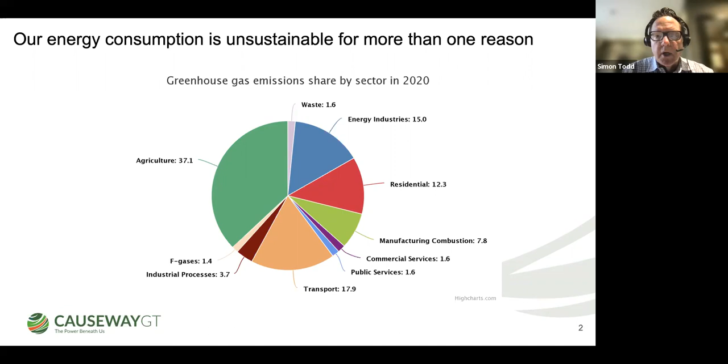And I think it's fair to say that there's progress on mobility, electrification of transport particularly, and there's progress, particularly in Ireland, with the greening of the electricity grid. But it's not just that.

That said, over the last few decades, the cost of fossil fuels, particularly oil, and now natural gas, I would argue, has been creeping up and up. So, for example, in my career in the oil and gas industry, when I started, $16 or $20 a barrel would be happy days. And less than 10 would be pink slips and P45s.

Nowadays, happy days in the oil and gas industry is $80 a barrel, and today's $120 a barrel is exceptionally good. But this is a result of us having to put more and more effort into extracting oil. We're having to put more energy in to get the same amount of energy out.

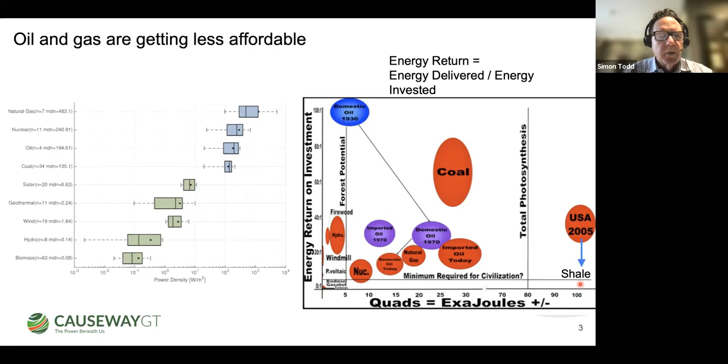So this is another reason why we need to get ourselves off of oil and gas, is that it's becoming increasingly finite as a resource and too expensive for our economy. And then the third reason is security, reliability. And this is illustrated for decades by oil. You know, when a sniff of a crisis affected oil price the next day or the same day.

And now that gas has joined its elder sibling as a global commodity with LNG and far-reaching pipelines, gas has the same problem of supply-demand tightness and relaxation, of geopolitics, of trader anxiety, and of course, unfortunately now, the cost of war and conflict, in this case, in the Ukraine.

And Ireland is right at the end of a very extensive pipeline infrastructure across Europe. Not all the gas is coming from Russia, of course, where the UK only takes about 1 or 2% of Russian gas. Most of it comes from the North Sea and some LNG imports.

But the island of Ireland is at the end, has no LNG import, and is at the end of an infrastructure that has 3 pipelines in the Irish Sea, all coming from a single terminal in Moffat in southwest Scotland. And so that represents a security risk as well as a price risk, because we're dependent on the price structure and price swings in the rest of the infrastructure.

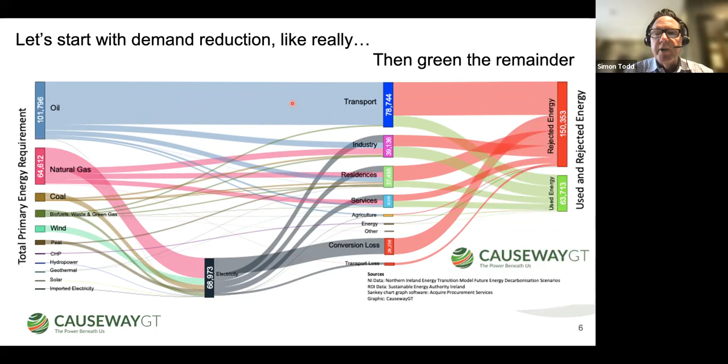So that's job number one with the energy transition, to radically reduce our demand through re-engineering our systems and improving efficiency. And it's not just about technology and engineering, it's about societal norms and expectations. I've picked on SUVs here. There's a stat going around that if SUVs were a country, they'd be the 6th biggest emitter in the world.

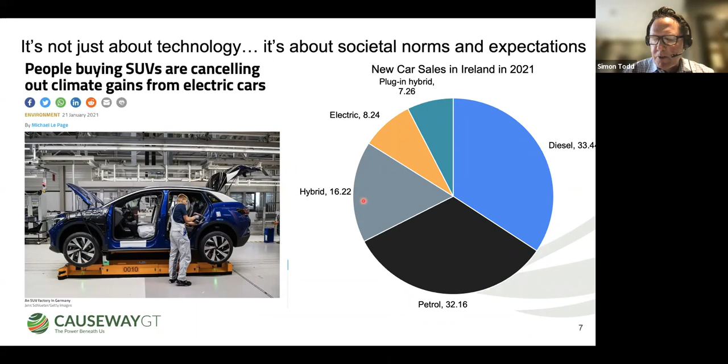People are still buying SUVs and running around in them, even though we are doing a better and better job of hybrid and electric plug-in hybrid sales; this is Republic of Ireland data from last year. But we need a way of changing our attitude and our cultural norms, so that a Range Rover Sport is not the preferred option anymore. It's go get yourself a Tesla Model 3 if you want something fancy, but much more sustainable as an option.

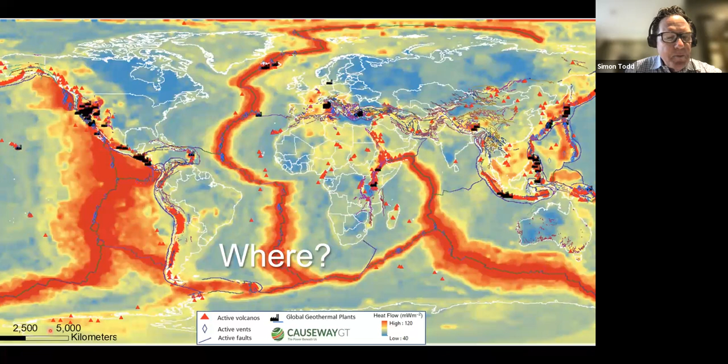Meanwhile, we do know that geothermal is being used around the world. There's electricity generation from lower temperature resources, 80 to 180 degrees centigrade, but they typically are very close to the surface, less than a kilometer. The big energy, 50% of the geothermal energy that's used, is actually used in combination with heat pumps in domestic, commercial, industrial settings. And then there's some direct use. So this is to give us a flavor of what might be possible here in Ireland.

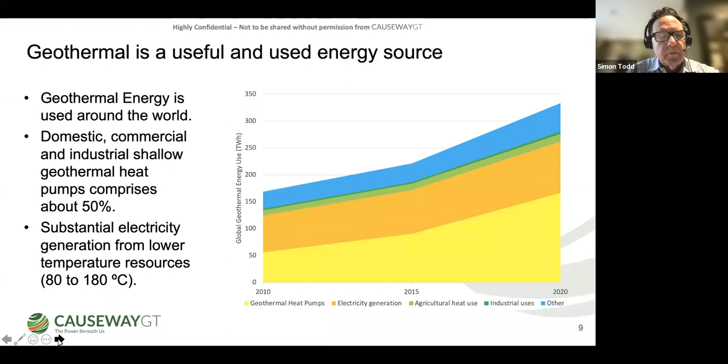A reminder of the principal archetypes. There's 2 geothermal resources, I would assert: shallow, less than 500 meters or thereabouts. Those resources are typically used in combination with heat pumps. It's also a fantastic storage medium, shallow geothermal, which is important and we'll touch on again. And the second one is deep geothermal, typically more than 500 meters, actually considerably more than 500 meters in settings like ours. And that direct heat is for power generation or direct use of heat.

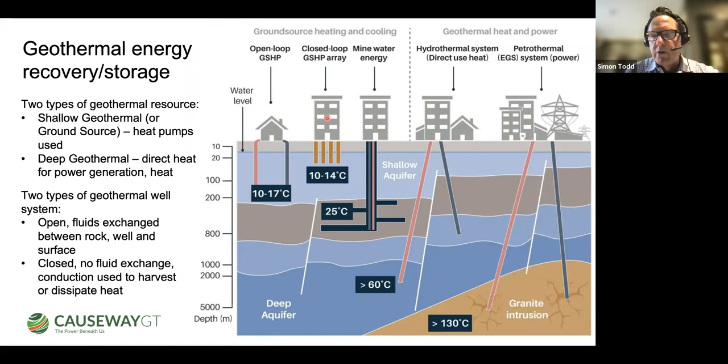Basically 2 types of geothermal system. I'm really oversimplifying this, I know, but one I would say is open loop, where fluids are being exchanged from the well into the rocks and back again. And the second is closed loop or advanced geothermal systems, AGS, where there's no fluid exchange and instead conduction is used to harvest the heat. And on this BGS diagram, the shallow systems are on the left-hand side, and the deep systems are on the right-hand side.

So now to problems. I've got three problems to posit that we could solve or address with geothermal. The first one is the issue of variability and intermittency on wind and solar. Just recently, Ireland did an auction on 9 new gas generation power plants, apparently 1 or 2 of them to be hydrogen ready, all about them being peaker plants. This is because even when you put more and more wind and solar into a regional or national grid, you still need dispatchable thermal capacity to cover off shortfalls when the wind isn't blowing for a number of days, or the sun isn't shining for a number of days.

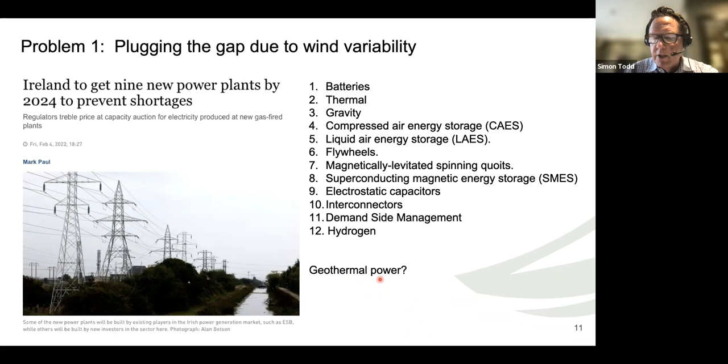And I've put a dirty dozen here of different mechanisms of providing storage of electricity, or storage of energy in the case of thermal, and none of these are really at the moment up to covering off periods of days and weeks. Batteries can do very well for nanoseconds, seconds, minutes, and a few hours, but they can't do days and weeks as yet. And so the romance about geothermal power is, can you use it as a dispatchable base load to complement wind and solar? And an answer for Ireland is unfortunately no, or at least not for some time.

It's really hard in Ireland because the temperatures required for any reasonable efficiency in power generation are at substantial depth. Although binary organic Rankine cycle turbines can generate electricity at 80 degrees centigrade, they really need about 120 degrees centigrade fluids before you've got any reasonable efficiency, and this is still only 15%. And when you combine that with drilling costs, the blue dots are US Department of Energy data, it shows that to get to the temperatures you require in Ireland, you're talking $15 million per well or more, and the economics just don't make sense.

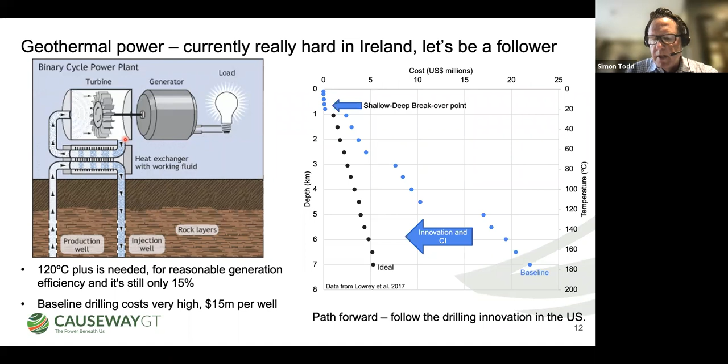So I'm just going to pause before I address the second problem and do a little sidebar on heat pumps, just to make sure that everybody falls in love with heat pumps the same way I have and Causeway GT has. Heat pumps are marvelous pieces of engineering. They actually have efficiencies greater than 100%. And how they do that is they soak up heat from a source through a heat exchanger, and through evaporation, compression, and... I've lost the word.

It'll come back to me, but through the heat pump process, the temperature is elevated, and more heat energy is delivered to the target sink than is used as electricity. So in other words, for 5 units of electricity doing the work of the heat pump, the compression piece, and soaking up 10 units of heat from whatever medium, in our case geothermal, 15 kilowatts of heat are delivered. So the COP, the coefficient of performance of the heat pump in this case, is 3.

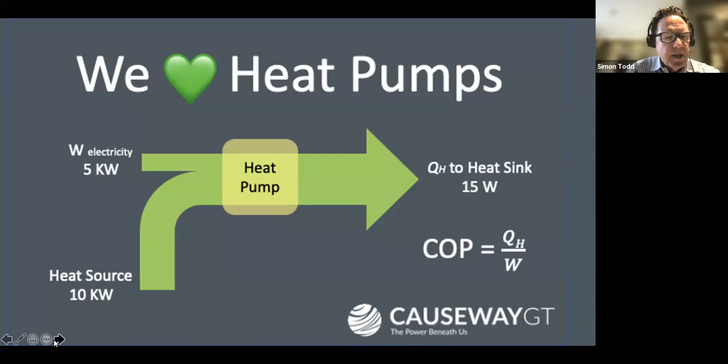Heat pumps are actually able to do much better than that, particularly where you're not having to elevate the temperature so much. So why am I doing this little sidebar on heat pumps and COP? So here's a typical sort of ground source setting, everything from freezing conditions in the subsurface to typical 12 degrees centigrade temperatures. To get to a sink temperature of 55 or 60 degrees centigrade, which is usually the minimum requirement to eliminate Legionella, you need a source temperature of 12, COP of 3 gets you to the required

delivery temperature. Then over in this right-hand chart, I put the same COP of 3 and I track it up along the y-axis of levelized cost of heat. And what you see here is that if I have expensive electricity at 14 pence per kilowatt hour, my gas boiler is actually more cost efficient than my heat pump. But if my electricity cost comes down to 10 pence per kilowatt hour, my heat pump is now competitive. In other words, one of the primary factors for the competitiveness of heat pumps is electricity price and how that relates to the coefficient of performance of the machine itself.

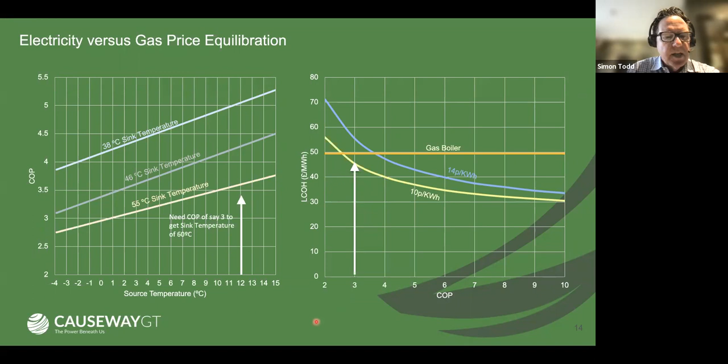So then problem number 2 is heat above 80 degrees centigrade. So this is heat that would be in low-grade industrial processes and high-grade industrial processes. I don't think we can do much in the very high temperature regime, like in terms of metals manufacture, aluminum or steel. But I do know that we can do a lot of good and a lot of elimination of fossil fuels in the lower temperature range from 80 to 140.

How's that so? Well, for example, in the northeast of the island, there's some super opportunities of open loop permeable reservoirs where the geothermal gradient is a little bit elevated as well, and you can see 50 degrees centigrade at 1.5 kilometers depth. Using industrial scale heat pumps, megawatts in scale, a 50 degree centigrade source temperature is really useful when you put a heat pump on top of it, and it can be elevated up to 125 degrees centigrade, which is a bit of a magic number because once you get there, you're able to generate steam, which is a very common fluid used in many different manufacturing and industrial processes.

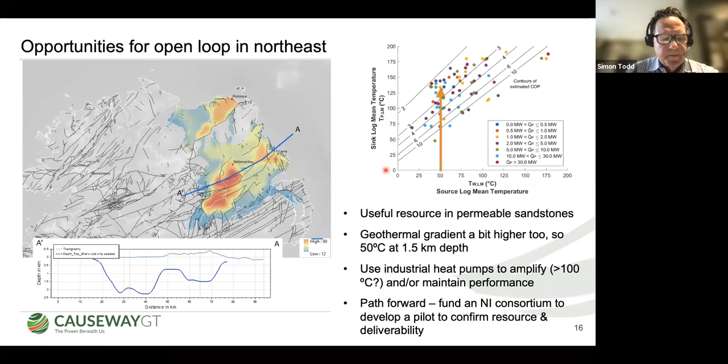So what I'll argue to the group on the call is that one of our priorities is to make a demonstrator of this happen, and County Antrim and the region is probably the favourable place to do this. But that's not all.

In Causeway GT, we're pretty well focused, not exclusively. We will consider open loop, but we're pretty focused on closed loop because although it's got the slowness of conduction to deal with, its advantages are significant in terms of not needing porosity, not needing permeability, not needing to exchange fluids, not needing to worry about induced seismicity, not needing to worry about contamination of aquifers or bringing geothermal brines to the surface, and never ever having to mention the word frack in polite company outside of the state of Texas. So we're focused on closed loop. What can be done with that?

So there's a recent study that's just been released beginning of the year from Cornell University. Beckers et al. are the authors. They ran a number of interesting scenarios, simulation models on closed loop systems. And what they found was the levelized cost of heat from these different closed loop scenarios, the mean, was $46 per megawatt hour. And that's quite attractive. Whereas for electricity, it was over $800 per megawatt hour. And this is essentially the inefficiency of low temperature electricity generation coming through in these costs. So they agree that for lower temperatures, power generation is very challenging, is the phrase they used, but I have to say they did not include heat pumps in their study.

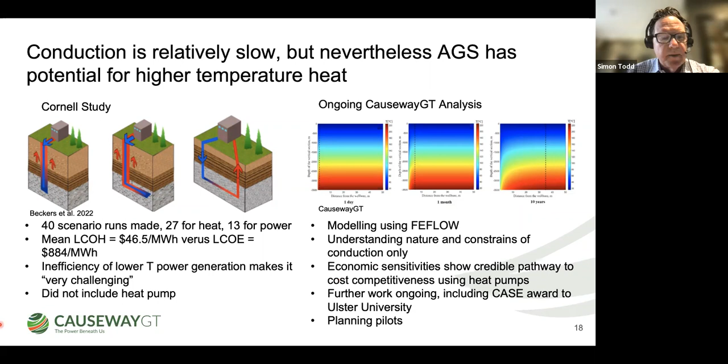There's further work ongoing, including some work led by Professor Neil Hewitt in Ulster University, where we were awarded a CASE grant for that work last year, and we're planning some pilots to test this technology. And if we can make that work, we can do a lot of decarbonization of lower grade industrial heat. And then the final problem is everything else.

Now this is my chart of the distribution of heat use in Ireland. It looks a bit different from the recent SEAI study, and I'm still trying to understand why they've come up with a bigger proportion of higher temperature heat. But suffice it to say that more than half, and I think considerably more than half of the heat that we use is actually less than 80 degrees centigrade. Space heating, water heating, space cooling as well. And this brings us right into the domain of heat pumps and geothermal heat pumps specifically.

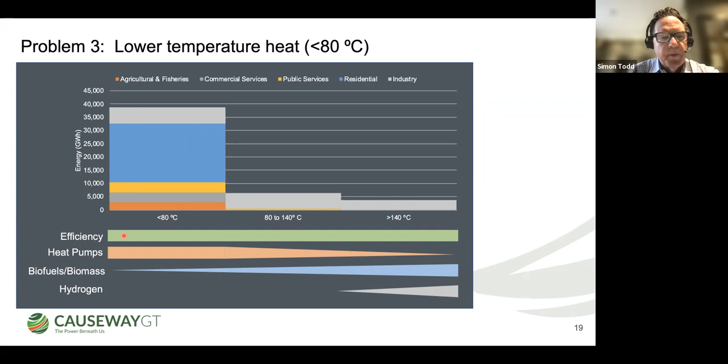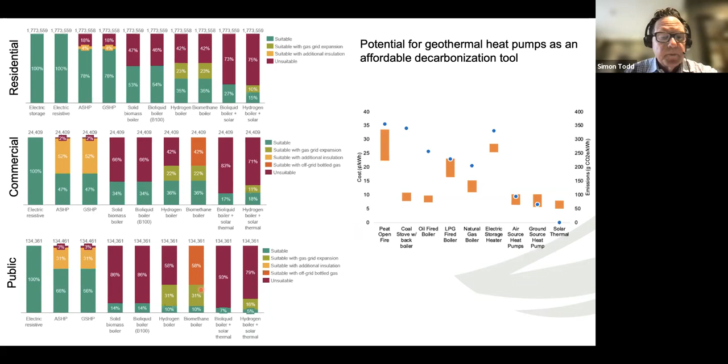Lots of potential there. And then on the right hand side, I've taken some older SEAI data on the costing of different residential heating mechanisms, and geothermal ground source wins the day in terms of efficiency. Also very low emissions, of course, particularly as the electricity used gets cleaner and cleaner. But solar thermal is good as well, and obviously air source heat pumps are good as well. So an interesting combination there between cost competitiveness, emissions reduction, and on the left hand side, suitability. So I actually think that we ought to be persuading policymakers to change the dimension on the use of shallow geothermal heat pumps.

Here, for example, is the case of commercial and industrial lower temperature heat. There's a cartoon picture of Microsoft's expansion of their campus in the state of Washington in the Northwest United States. It's plus 10 megawatt thermal heating and cooling, and it's all served by a geothermal system down to about 150 meters depth, both storage and borehole heat exchangers, and a vast heat network of pipework supplying it. And a very low emissions product as a result.

On the right-hand side, there's a couple of maps, one from GSI, which shows that in the Republic of Ireland, the suitability for closed loop is very high. In other words, there's only about 5% of the country that is not suitable for closed loop geothermal systems. And Northern Ireland is actually a similar picture. I don't want to embarrass Rob Rain, but the map is really good. But the color coding of the scale is misleading, because 1 watt per meter per Kelvin is actually really good conductivity for a closed loop system. And 0.5 or 0.25 would be seen as okay.

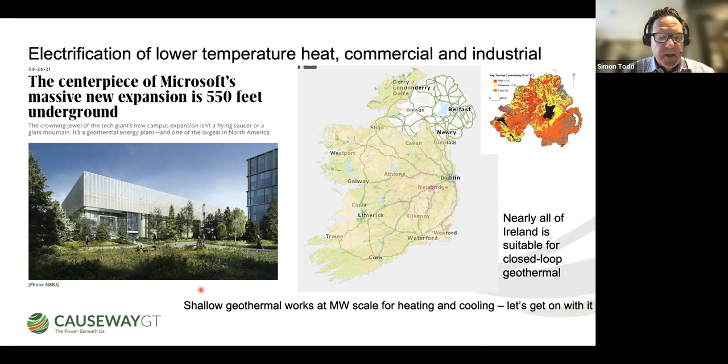So why aren't we doing this already? I hear you ask. And the answer seems to be a combination of a number of different factors. A good way to get to the answer is to compare ourselves to other countries with higher uptake of geothermal, and the poster child is Sweden. And it's an interesting poster child because, according to Helen's map, Sweden, as you might expect if you're a geologist, is actually lower geothermal gradient than Ireland and Britain, and certainly lower than some other countries in Western Europe.

But having said that, Sweden is one of the highest, if not the highest, geothermal energy user, and the vast majority of that's heat pumps, ladies and gentlemen, at the scale of kilowatts to megawatts that I've been describing. So the little cool colors over in Ireland and Britain in terms of geothermal usage, we need to fix that, right? The reasons for slow uptake seem to be about ambition. Sweden has been decades on the journey of decarbonization and are blessed by renewable resources like hydro, I have to say.

I think the second thing is about awareness, and its cousin, myths and legends. People say things like, "Well, heat pumps won't work on leaky homes," and the retrofit's too expensive, or things like that. There's a capability issue. We have some expert resources on the island that know about heat pumps and shallow geothermal, that's for sure. But I actually think we need more. We need more organizations, companies, and capability on this matter.

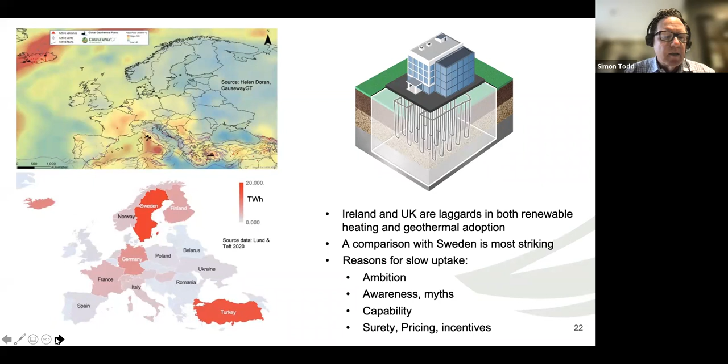I'll get to a little bit more detail on this next point, but commercial developers and operators of geothermal heat systems are going to need some assistance on pricing and incentives and security or surety of their supply. In other words, if I'm putting a geothermal heat system underneath a commercial building, I need to know through a power purchase agreement or heat as a service contract that the owner of the building is going to be using my heat for 15 or 20 years, for whatever the duration of the agreement and the project actually is.

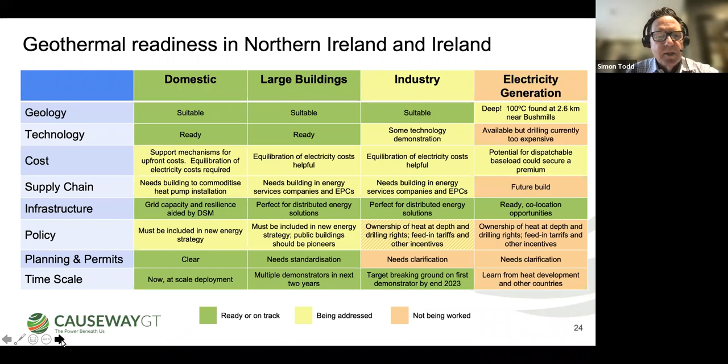So then I think the next slide is my last. Yeah. So Sarah, this would be my segue into the discussion. So this is my view on priorities, policy support, public and private sector. I'd really love to hear the input, questions, of course, about my presentation, but discussive questions on these priorities.

So I'm saying, let's get after geothermal heat pumps, small and large scale, deploy. Let's get after it. Let's get engaging with the public and the stakeholders on this and get their support. It's a decarbonization, low-hanging fruit opportunity. Just let's get going on it, and contribute to technology development on this where it makes sense to Irish needs and the resources and skills and expertise that we have on the island.

In terms of policy support, we certainly do need clear and efficient regulation and regulatory process. We need some help with price structures, some help with heat network and the equivalent of heat power purchase agreement structures. I think there's a super opportunity for both jurisdictions to put their public buildings and land up for tender for demonstrators and pilots. And we should do that with some funding from government to support those pilots and demonstrators in both jurisdictions.

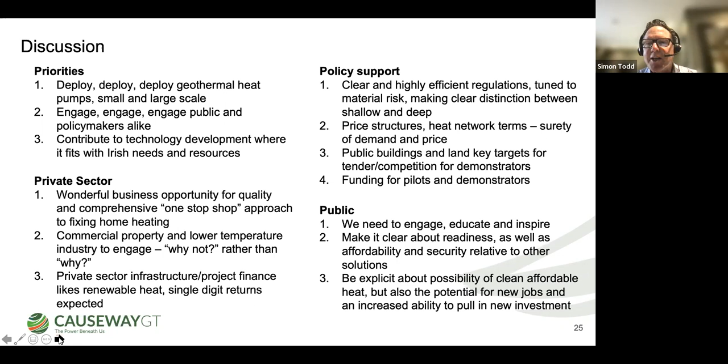And there's also an opportunity to consider job creation and competency and capability creation, both for technical engineers, installation and maintenance and operation, but also for masters and PhD type engineers and geoscientists to be involved in this fledgling and growing industry. And my Causeway GT colleagues and I are firmly set in the vision that we want Ireland to actually become a centre of excellence for geothermal energy in the future.